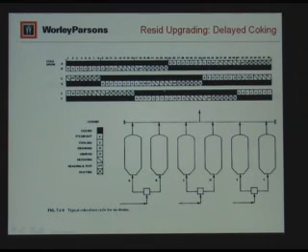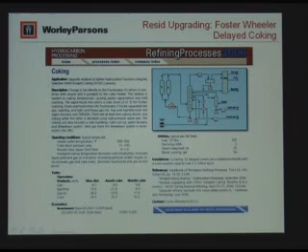Now this is Resid upgrading, the Foster Wheeler process. They're the licensor of this, and then there are other licensors. ConocoPhillips has a process, and this is fairly typical of the kind of processes I've already shown. And again, it gives you an idea of the kind of products you're going to get.

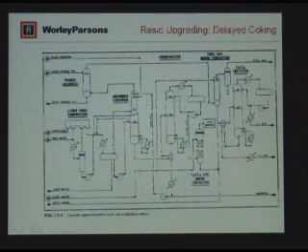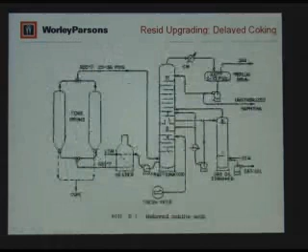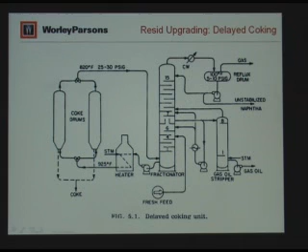Now, downstream of the coker pot, we have what you can call a vapor recovery unit or a light ends recovery unit. Basically, if we drop back a couple of slides, here we go. See on the right-hand side, there's this reflux drum, and it says gas going over the top. Basically, you can process that gas into LPG and other types of streams. And that's what you do in the other part of the coker.

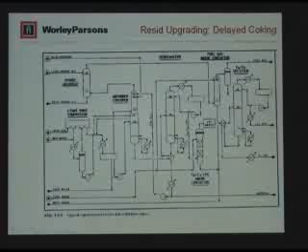Let's see. This is the kind of thing that you would get. So the vapor feed is coming in here on the left-hand side. There's a light ends compressor, and you compress the light ends up, because basically the tower is operating a little bit above atmospheric, maybe 10 psi or somewhere in that range. So you have to compress it, and then you go through an absorber stripper section.

We have a sponge absorber. They call it a sponge because the oil acts as a sponge. It kind of soaks up the components that they want out of the gas. So it's called a sponge absorber. It's basically just a column.

Now, in this downstream section, we've got a debutanizer, C3-C4 splitter, and an amine contactor. What we're basically trying to do here is produce the various gas streams. You can see a fuel gas, C3, propane, LPG, and then C4, LPG, and a naphtha stream.

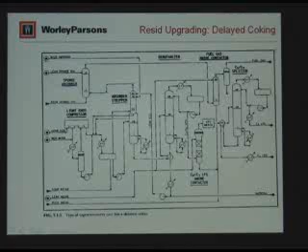So you're basically making use of these coker gases that come off the coke drum. Because when you do a thermal cracking process, you get a whole range of stuff. Some of it's gasoline, but some of it's light material. Obviously, you want as much gasoline as possible, and you control the conditions to get as much gasoline as possible, but you're going to make these other things as well.

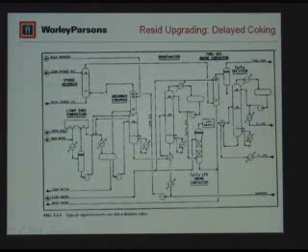So the coker is actually quite a complicated unit, because you've got the two coke drums, you've got the main fractionator, you've got all this stuff going on, the light ends compressor. So there's plenty of stuff going on, and it's a challenging unit for the operators to run, but most of them run very well.

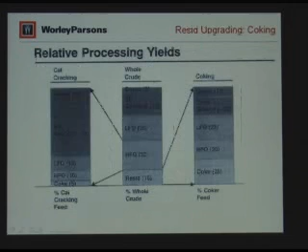I touched on one thing. I mentioned that you get a whole range of products, and obviously you need to get to the product that you want, which is gasoline. So if you operate a coker and make LPG, you crack it too much and you're not going to get the gasoline you're looking for. So you want to crack it enough, but not too much.

Here, for example, we're comparing a cat cracker and the kind of things you would get, and coking. You can see the kind of products you get: coker gasoline, light fuel oil, heavy fuel oil, and coke is 30%. So we get a lot of coke coming out of this thing.

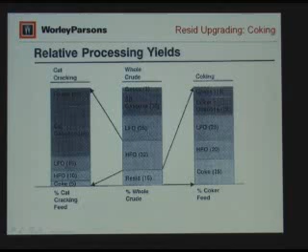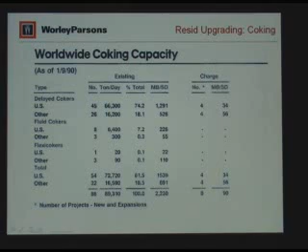Worldwide coking capacity. Delayed cokers - you can see we've got a lot of delayed cokers in the United States. Fluid cokers, again, I mentioned the cost differential. You can see there are some fluid cokers and flexicokers, but the capacity there, in tons per day, is much, much less. They still do build fluid cokers and flexicokers, but most companies would build a delayed coker for the cost differential. The fluid coker and flexicoker are licensed by ExxonMobil, so the chances are you'll only see them in an ExxonMobil refinery, or a refinery that used to be owned by Exxon or by Mobil.

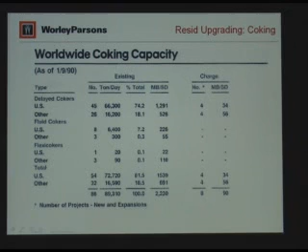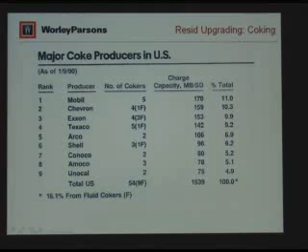Major coke producers in the U.S. Quite a few of these companies have merged - Chevron merged with Texaco, Exxon merged with Mobil, Shell is still Shell, Arco merged with Amoco and became BP America. Unocal, I think, sold off several of their facilities. And then Conoco, of course, merged with Phillips.

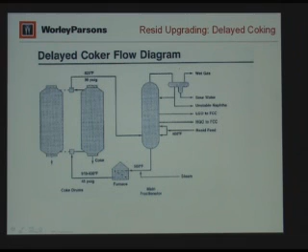All right. Now, getting back to our delayed coker diagram with our two cokers, two coke drums, the fractionator, and the furnace - let's do a little bit more here.

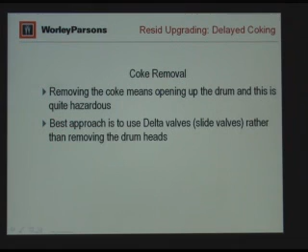I mentioned removing the coke is quite hazardous, and the current best approach is to use what they call delta valves, which are these big slide valves, rather than actually physically trying to remove the drum heads.

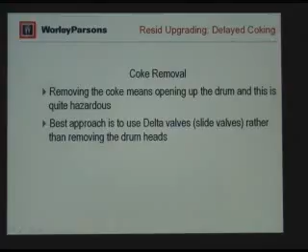Here they put the insulation back on. This one, the insulation is not actually there. The insulation has been put on.

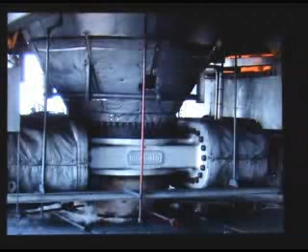How big is it? Well, the conical section goes up to roughly 26 feet, so this thing across is probably 10 to 15 feet across. So it's a big thing, and the one on top is big as well. You need one of these on the bottom of the coke drum, and one on the top. These pictures aren't the greatest, but the bottom of the coke drum is kind of hidden away in the structure, so it's difficult to get really good light down there. But this gives you an idea of the size of the thing.

Obviously, once you've installed these things - and of course they cost money to install - but once you've got them installed, all you have to do is hit the button and they open and close, and that's a big improvement on having to go and actually take the heads off. It's a much quicker operation, because instead of needing maybe 30 minutes, maybe an hour to get these heads on and off, you just open and close the valve, and it's relatively quick. So you can compress the cycle for more throughput.